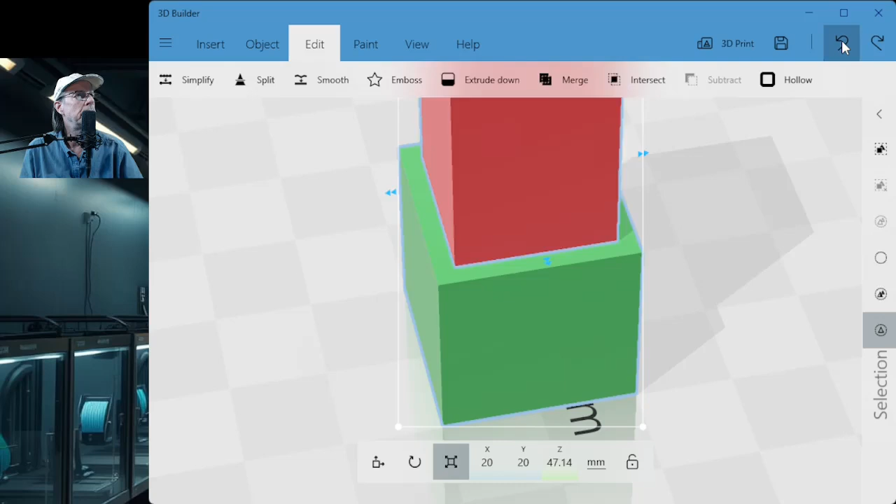I'll go ahead and use the back button and show you it being taken apart, and then I'll put it together from scratch. Okay, so these are all the steps that were done to get that little bracket made, and here we go. We'll create them again from the beginning.

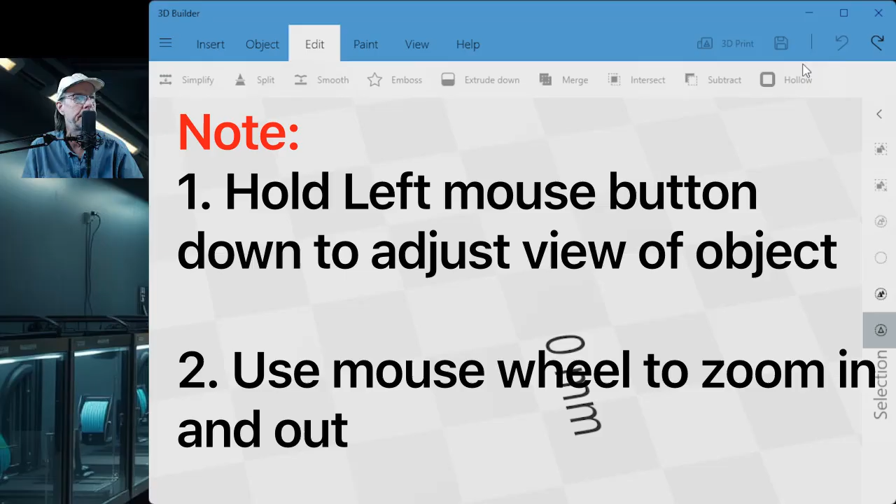We know our T-slot rail or T-slot bar is 20 millimeters by 20 millimeters, so we want our bracket to be 20 millimeters wide. With 3D Builder, you've got 9 shapes that you can start out with and then add, subtract, mix and match to create anything you want. Today we're just going to use the cube and the cylinder.

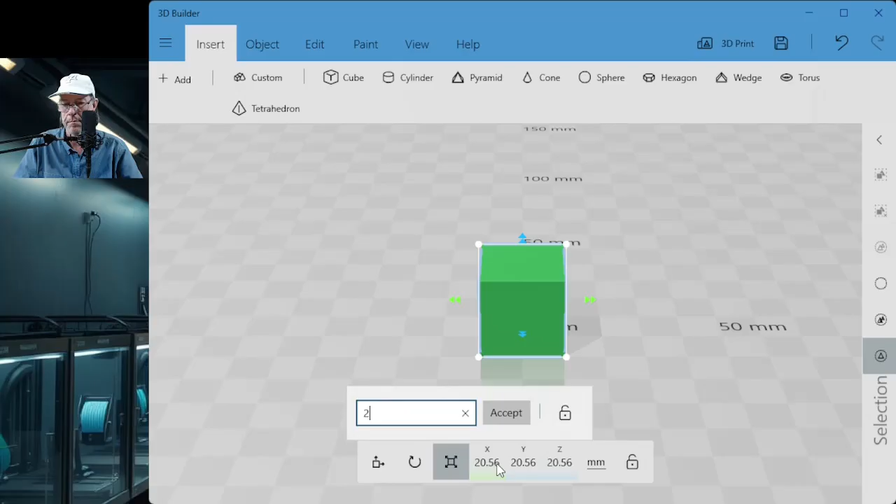When you first add an object, it defaults to 40 millimeters square, so we want to change this to 20 millimeters. You can do it by either dragging the corner down to the size you need, and if it needs to be perfect, you can type in 20 millimeters by 20 by 20. So now we have a 20 millimeter square.

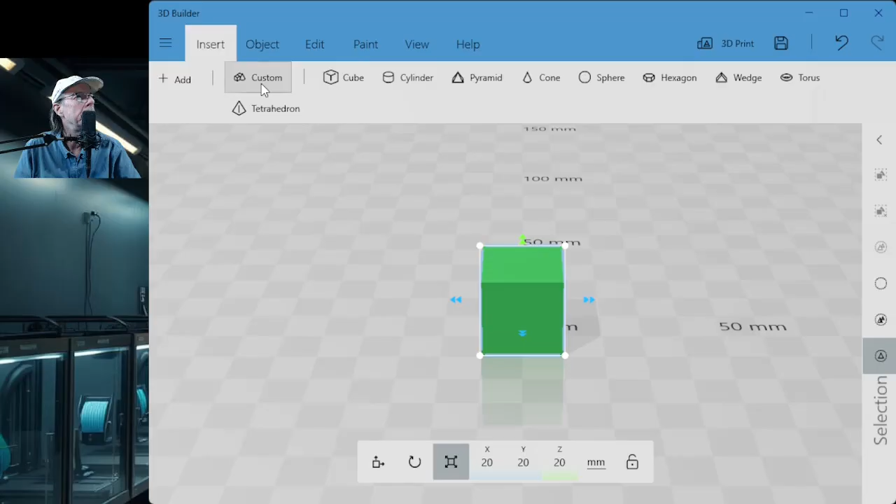Now we want to put in another square, and we're going to cut out that slot. So we'll go to insert, do another cube. To change colors on this, you click on the paint tab and we'll make it red so you can see the two different objects in action. For the inside, I want about 5 millimeters of wall on each side, bottom, and the back.

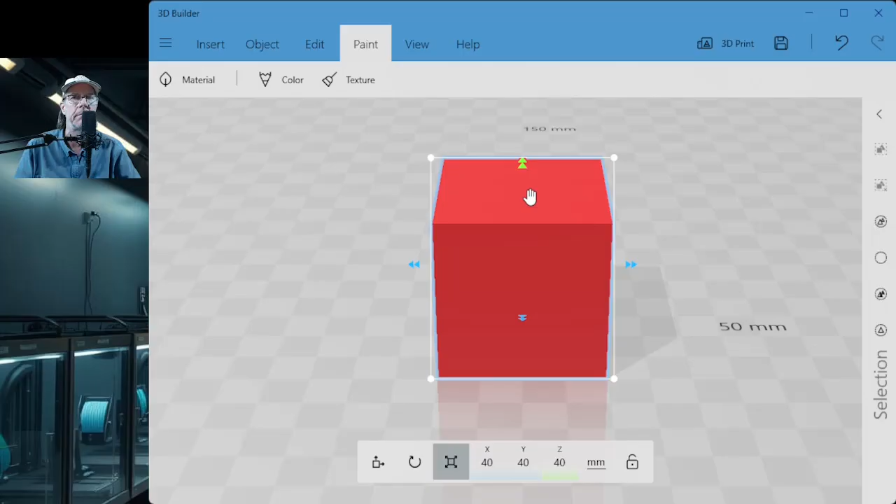So we'll make this a 10 millimeter wide object. Bring this down with the mouse to about 10. Doesn't have to be perfect, but if you want it perfect, double click. We'll click 10, accept, 10 and 10.

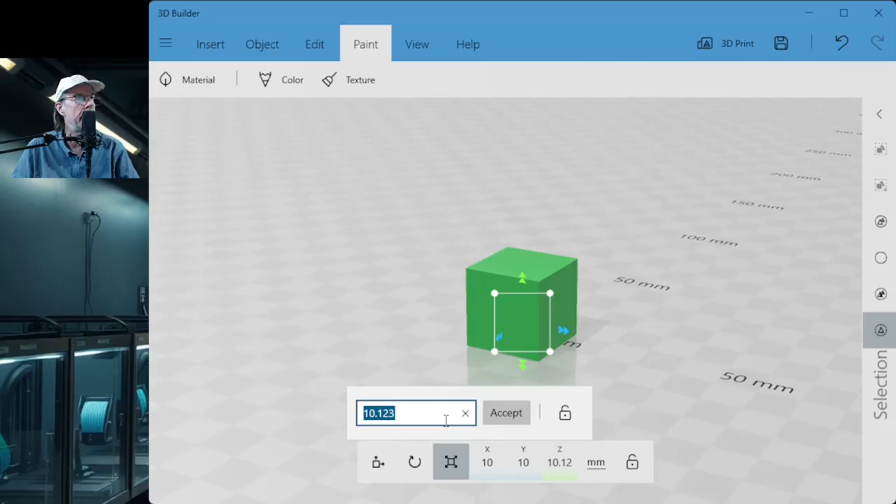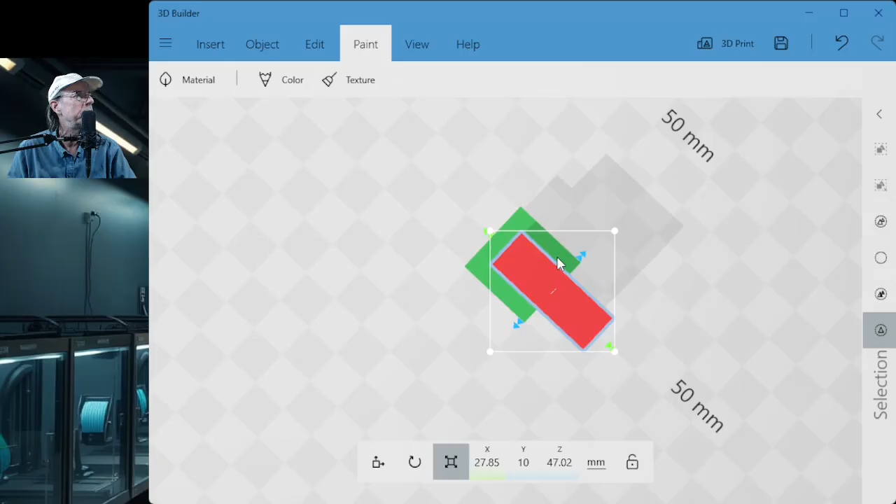We want to bring it up because we don't really care if this is 10, since we're going to cut out this section here, and we're going to cut out that section there. So we have about 5 millimeters on the sides and back, and the bottom we just need to raise up 5 millimeters.

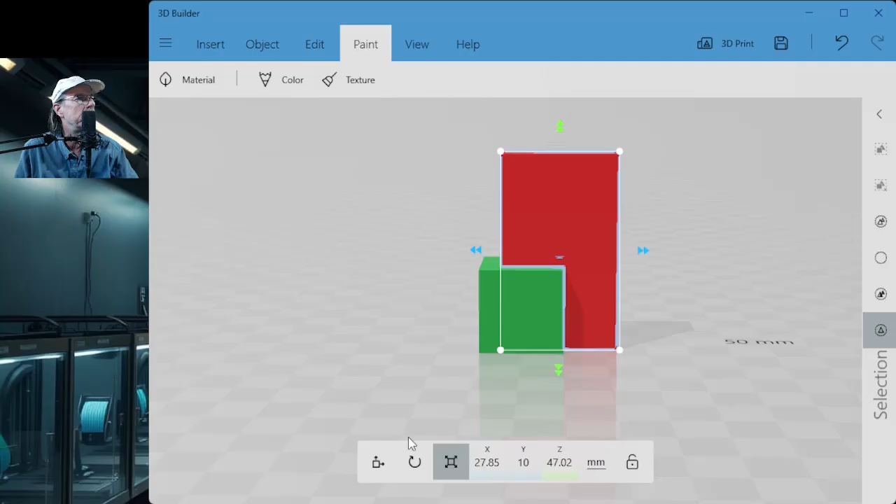So what we'll do now is just lift this whole red block up 5 millimeters. The easiest way to do that is to go over to this tab, which is where you move objects left and right, up and down, instead of this one which is where you reshape objects. We're going to move it up 5 millimeters since the sides and back are already at 5 millimeters.

Any time you click on an arrow, it'll change colors to yellow, and then you can look at the number down in the X, Y, Z and see which one's yellow. Since we want to lift it 5 millimeters, we'll click on the top and look at this number. It's 23.57, so we'll add 5 to that, and that'll be 28.57. 28.55, that's close enough.

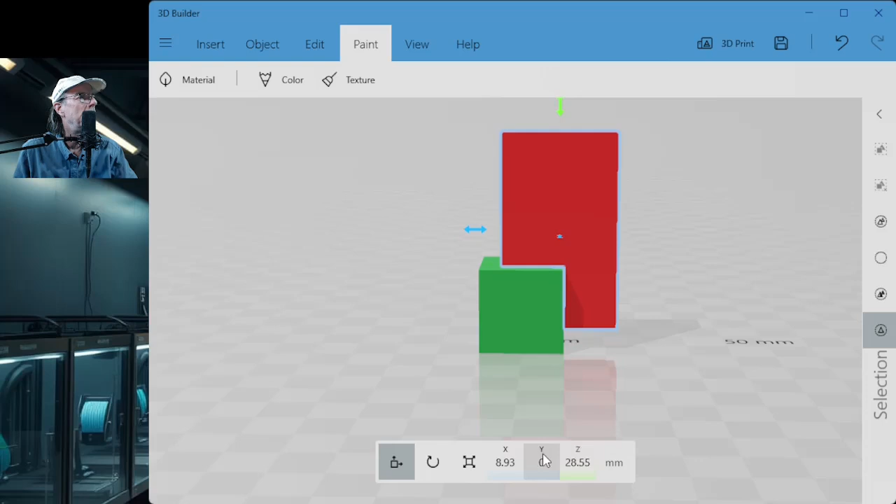And then we're going to subtract it. We're going to subtract this object from the green object. So to do that, you click on the Edit tab and subtract. All right, now we just need 2 holes to put the screws through.

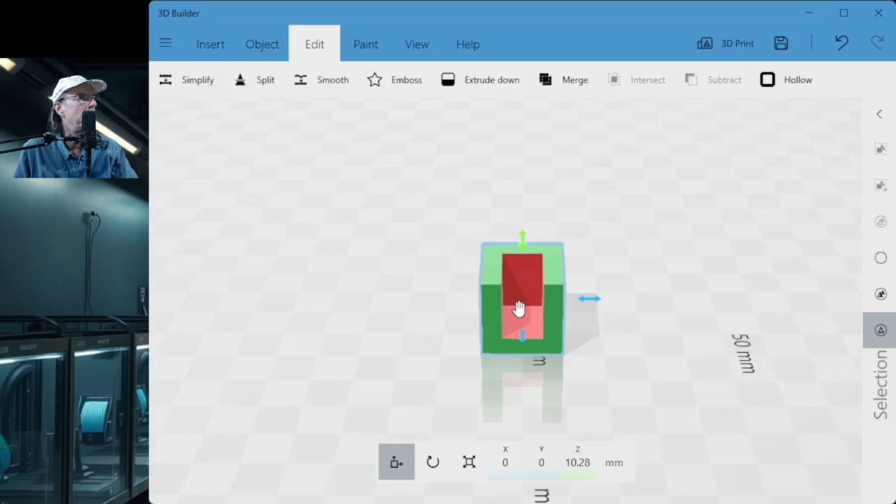And since I'm using 5 millimeter screws, we'll go ahead and use the circle cylinder. We'll add that. The default is 40 again, and so we want about a 6 millimeter hole so the 5 millimeter screw will easily go through it.

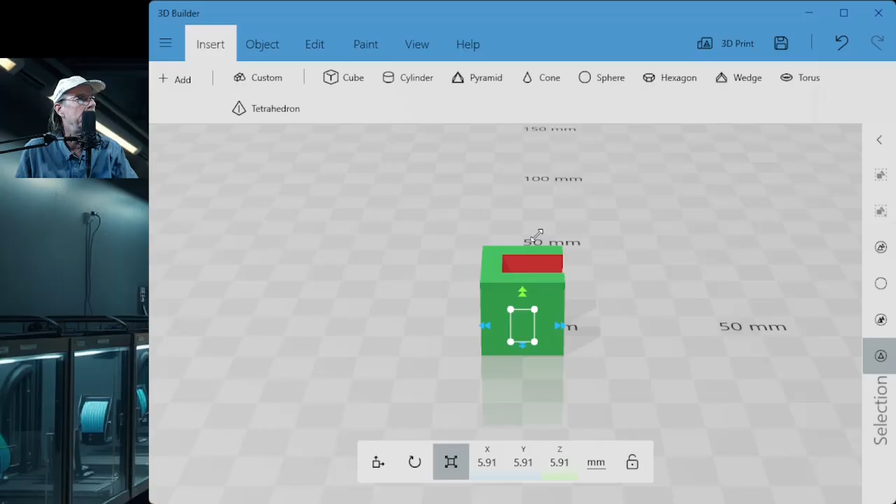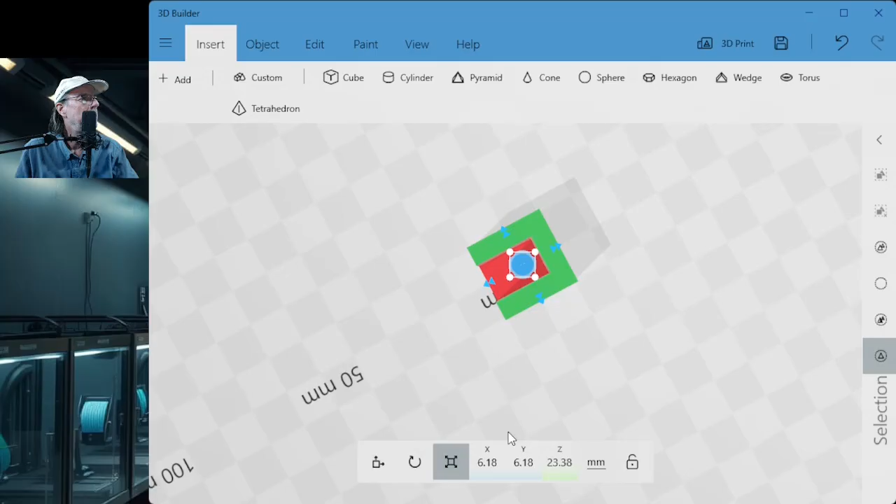6.18 is fine. Go ahead and raise the height, and we want to make sure it cuts through the bottom, so you can see it protrude through the bottom. And let's go ahead and move it to the left a little bit. It sort of snapped right in there.

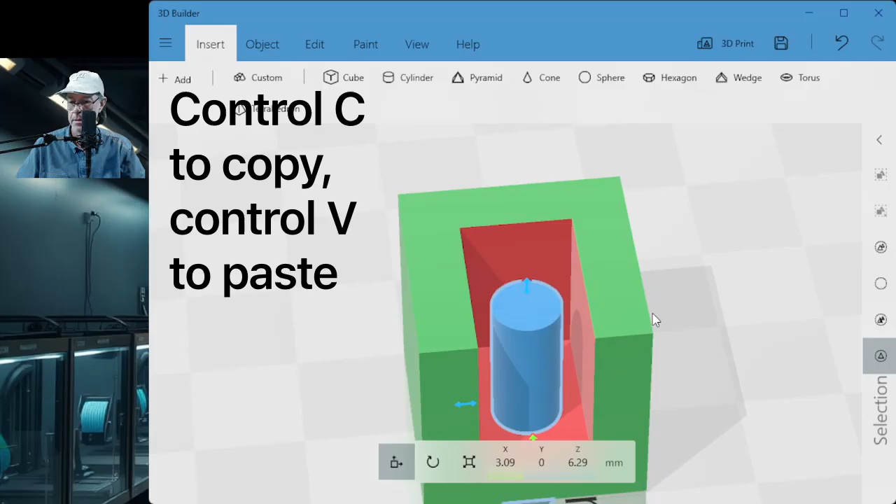That looks good. And before we cut a hole, let's go ahead and copy and paste it. So I'm going to hit Control C to copy it and V to paste it, because we need another hole in the back. And this time we'll go ahead and use the rotate tool. We'll rotate this 90 degrees.

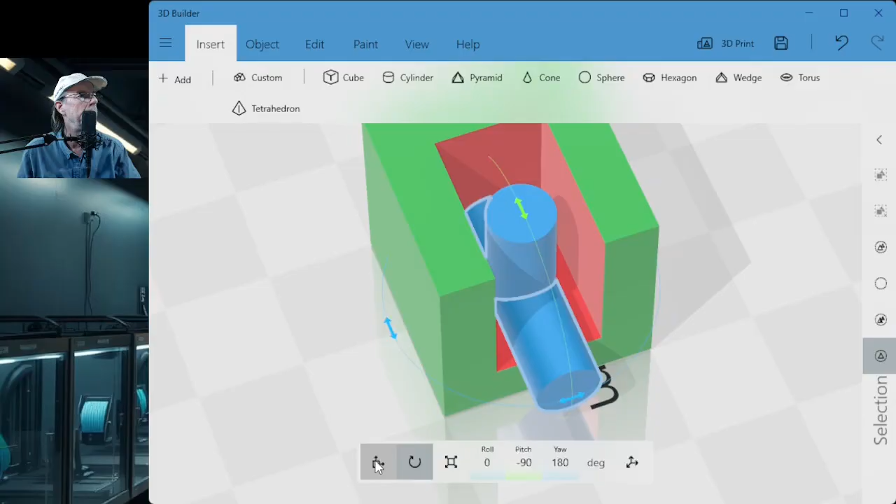Now we're going to move it back. Make sure it goes through both sides. And let's lift it up. That looks good. And that's pretty much it. Now we just need to create the holes by subtracting.

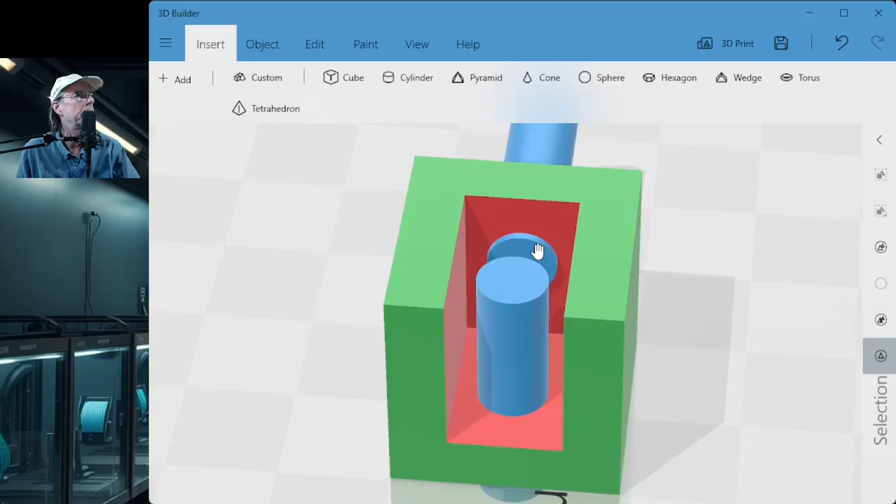Double click on that, make sure it's highlighted. We'll go to Edit, Subtract. There's our bolt hole. Double click on this cylinder. It's through the bottom, through the top. Click Subtract. And there's our bracket.

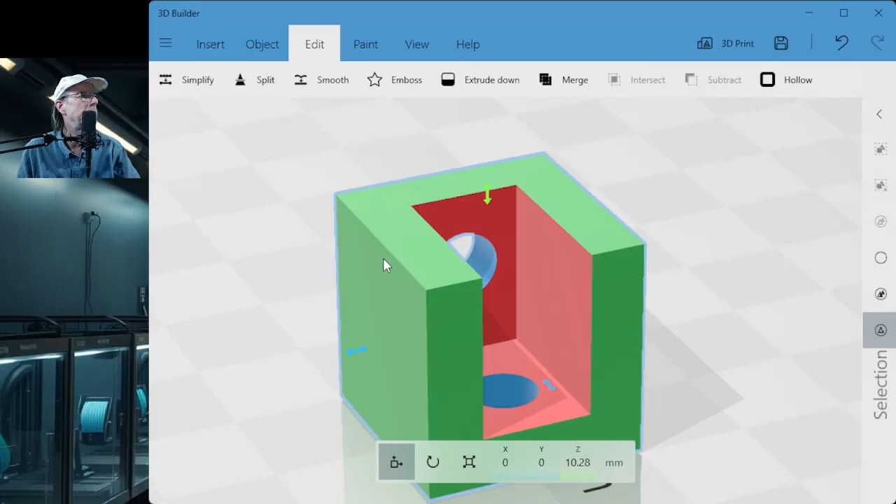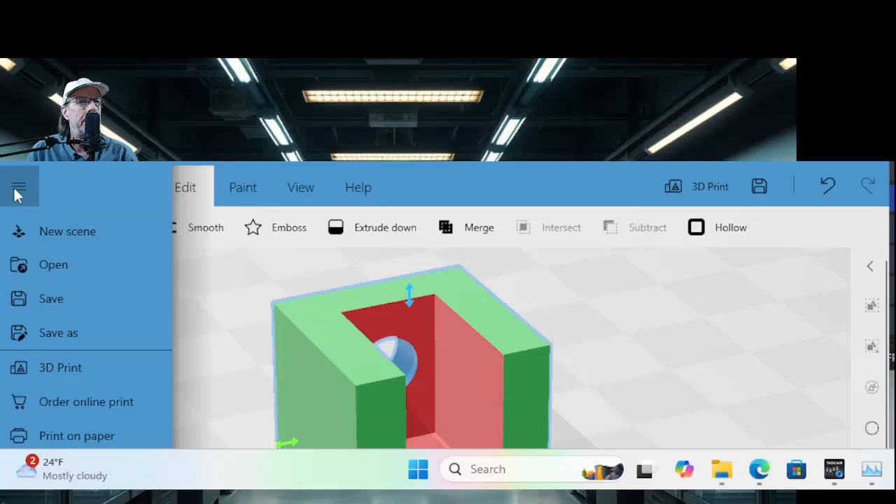I'll go ahead and print it, and we'll see what it looks like. Okay, first we need to save it before we print it, so it's always a good idea to save it into two formats. Just go up to the corner, click on Save As, and the first format is the 3MF format. We'll call this bracket 4. The second format is the STL format, which you can send directly to the printer. So go down to STL, bracket 4, save, continue.

And now we can print it. Okay, while it's printing, I just wanted to let you know the 3MF format, you want to save it in that to be able to edit it in the future. So just keep that in mind.

Here's our bracket. It came out perfect. The screw fits perfect. This is actually the second one. I mounted the first one, and it's perfect. The only thing I like to do is maybe cut these corners off, and I can do a video on that to show you how that would be done. It's very simple.